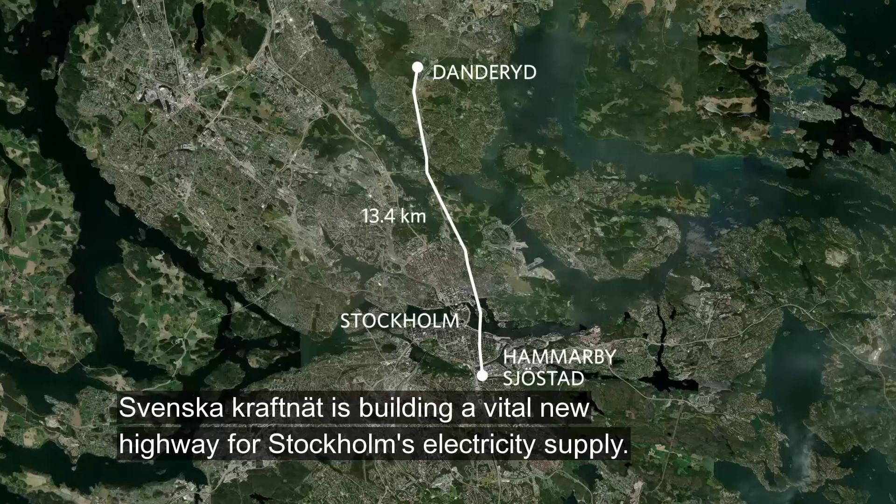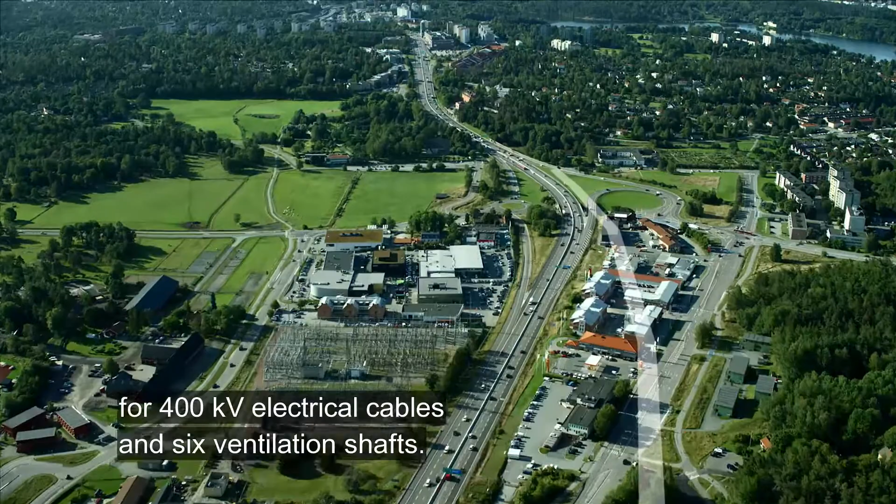Svenska Kraftnät is building a vital new highway for Stockholm's electricity supply. This is a 13.4-kilometre long tunnel between Danderyd and Hammarby Sjöstad for 400 kilovolt electrical cables and 6 ventilation shafts. The cable tunnel is part of an investment to reinforce the electricity network and safeguard Stockholm's electricity supply.

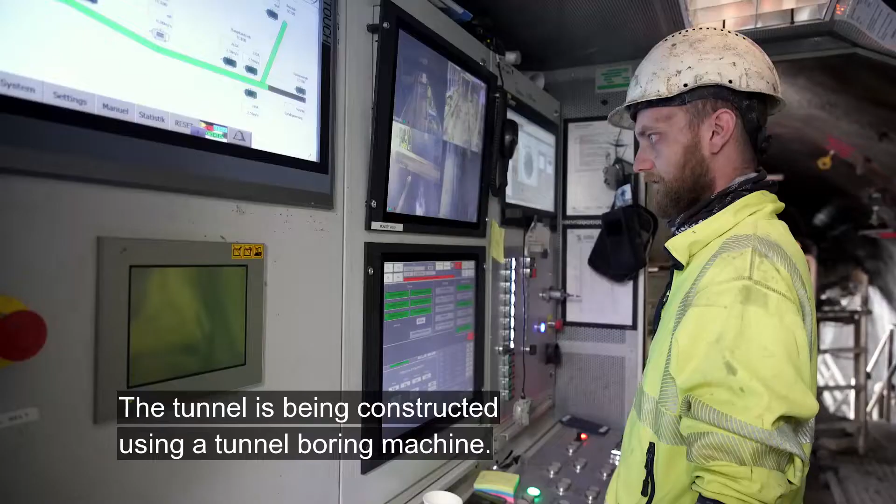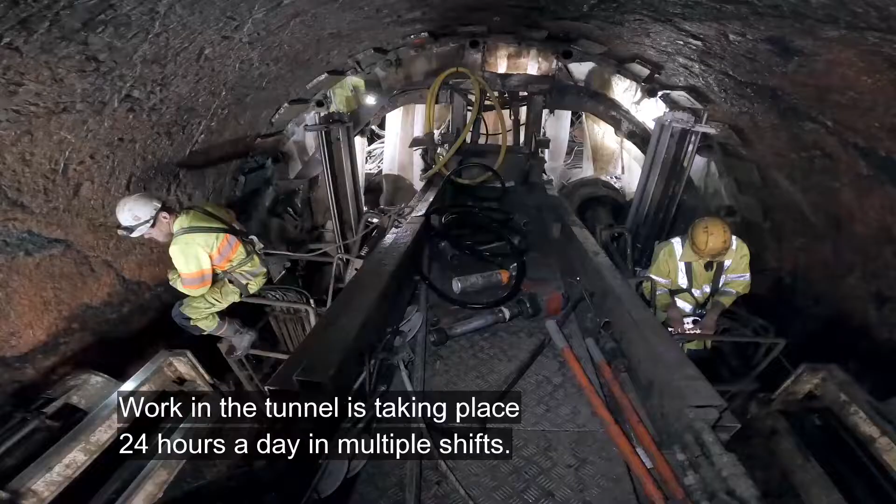The tunnel is being constructed using a tunnel boring machine. A joint venture between Hochtief and Implenia acts as the contracting company. Work in the tunnel is taking place 24 hours a day in multiple shifts. The teams working these shifts consist of people highly experienced in tunnelling, specifically working with tunnel boring machines.

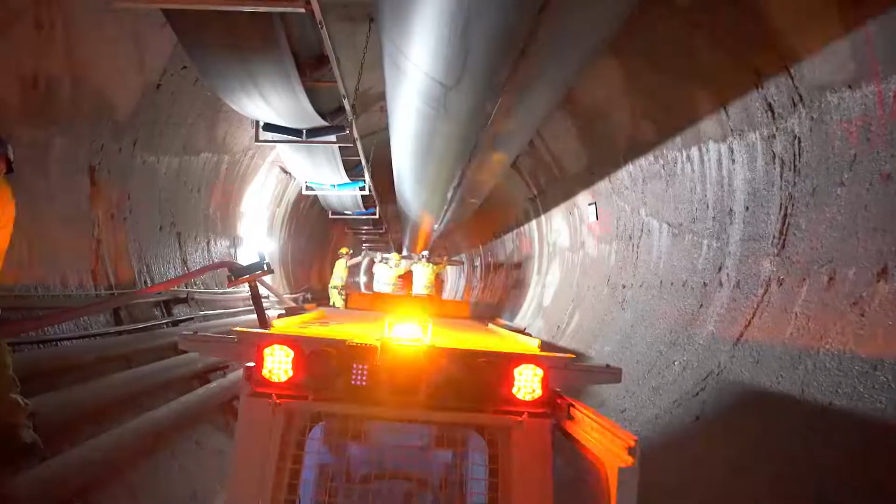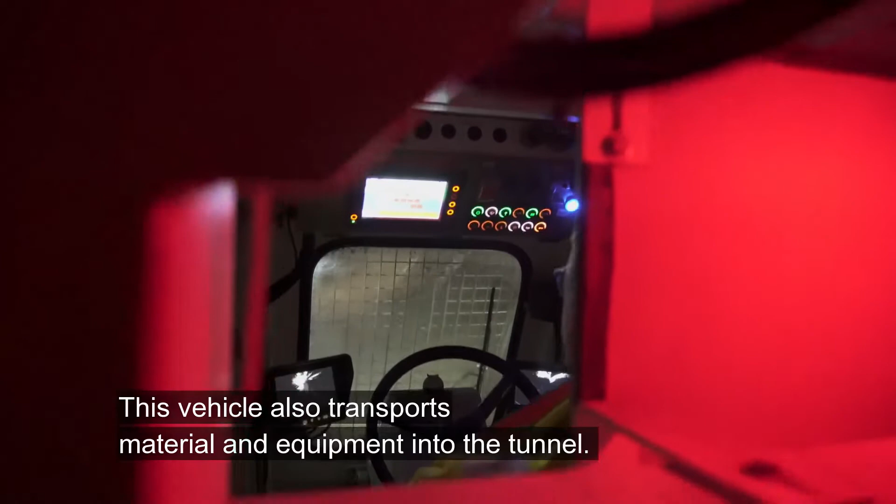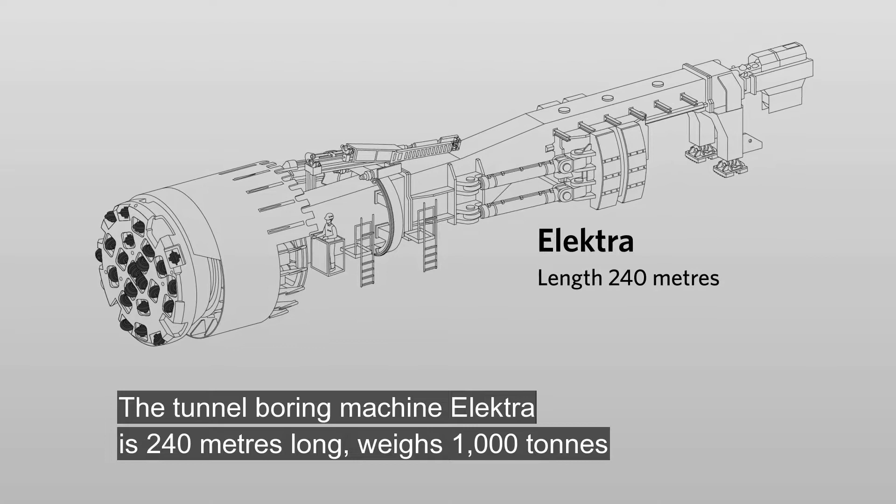The people working in the tunnel are transported in a specially designed vehicle that has driver's cabs at both the front and the rear. This vehicle also transports material and equipment into the tunnel. The tunnel boring machine Elektra is 240 metres long, weighs 1,000 tonnes and is manufactured by Herrenknecht in Germany. It's powered by electricity and requires approximately 3 megawatts of electrical power.

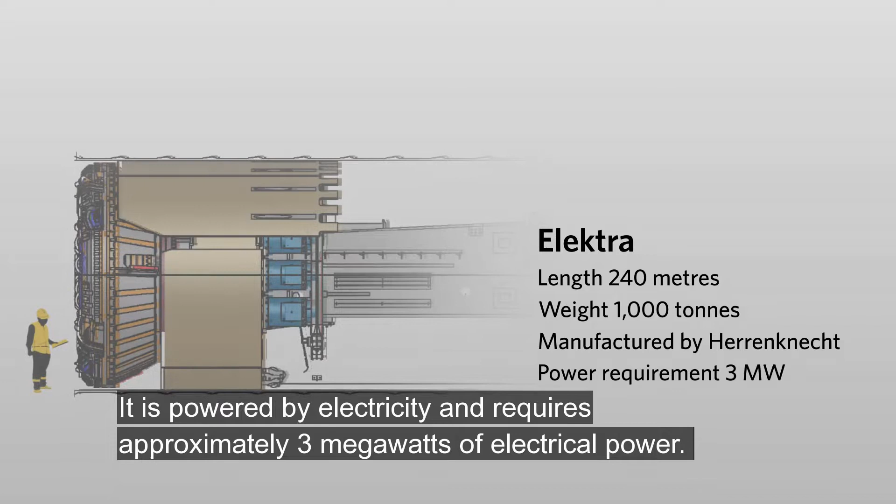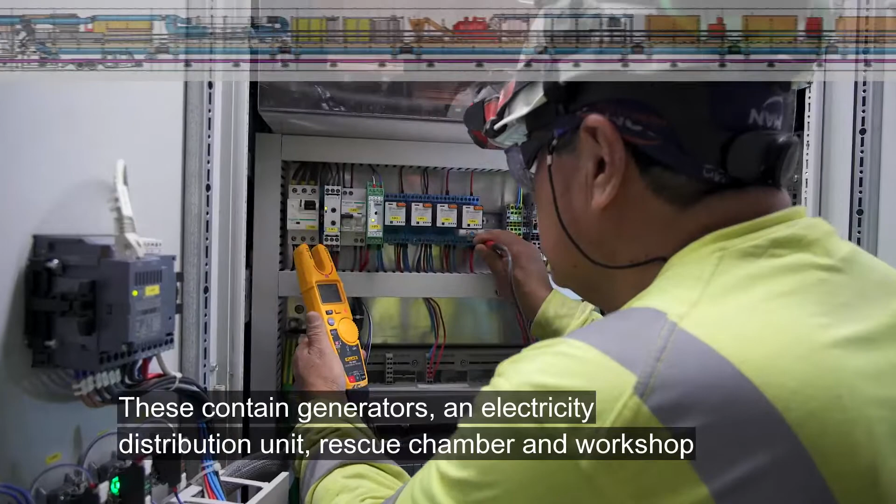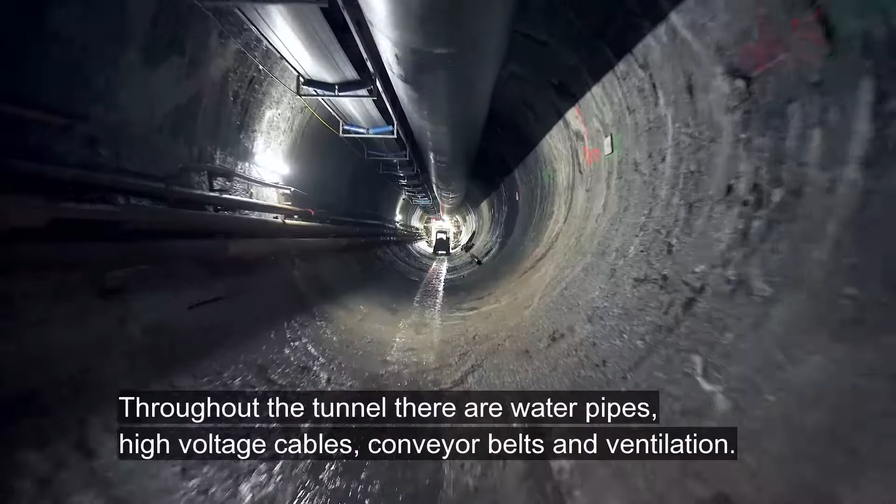At the very front is the cutter head, followed by 20 service cars that contain all that's needed for boring the tunnel, just like an underground factory. These contain generators, an electricity distribution unit, rescue chamber and workshop, as well as the operator's cab from which the pilot controls the tunnelling machine. Throughout the tunnel, there are water pipes, high-voltage cables, conveyor belts and ventilation.

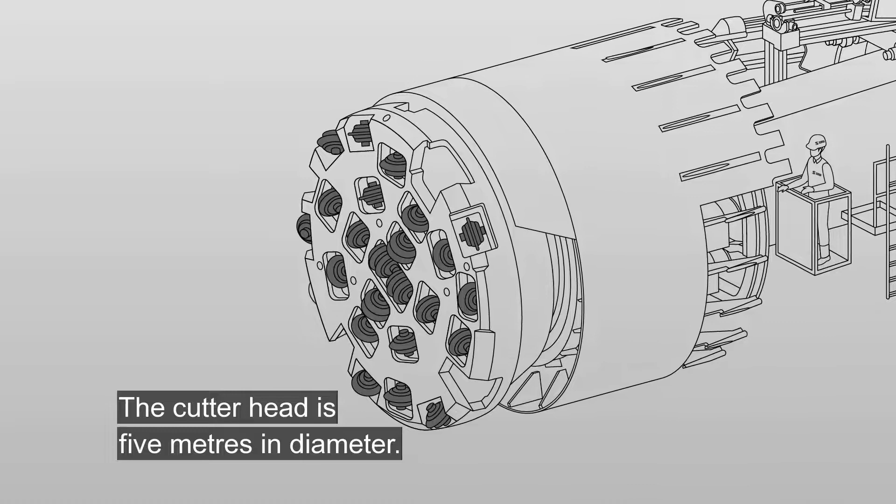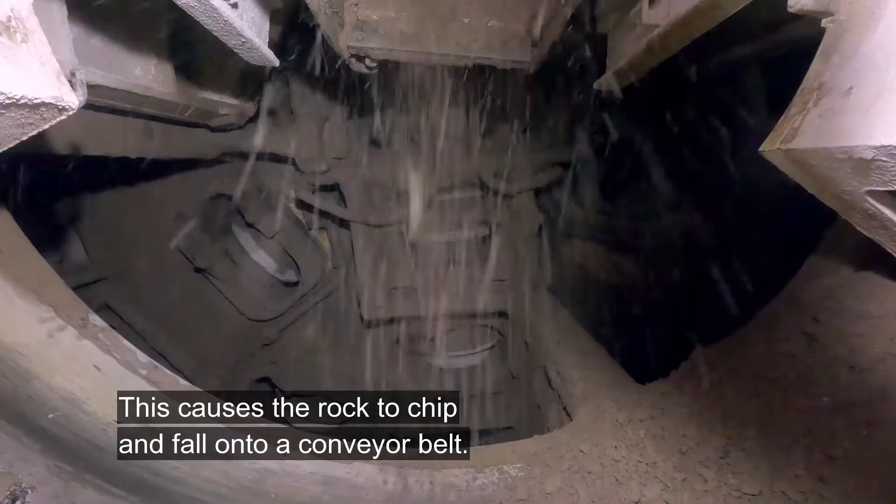The cutter head is 5 metres in diameter. It has 28 steel cutters weighing approximately 200 kilograms each. As the cutter head rotates, the cutters create a considerable pressure against the rock. This causes the rock to chip and fall onto a conveyor belt.

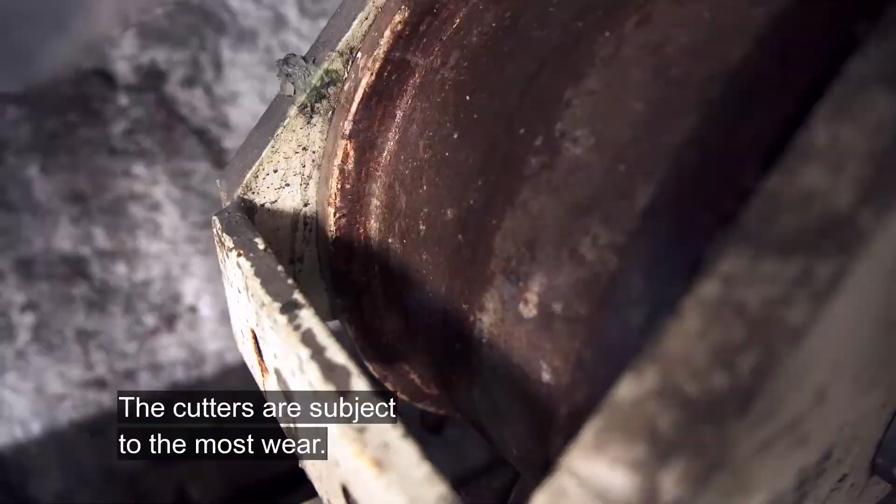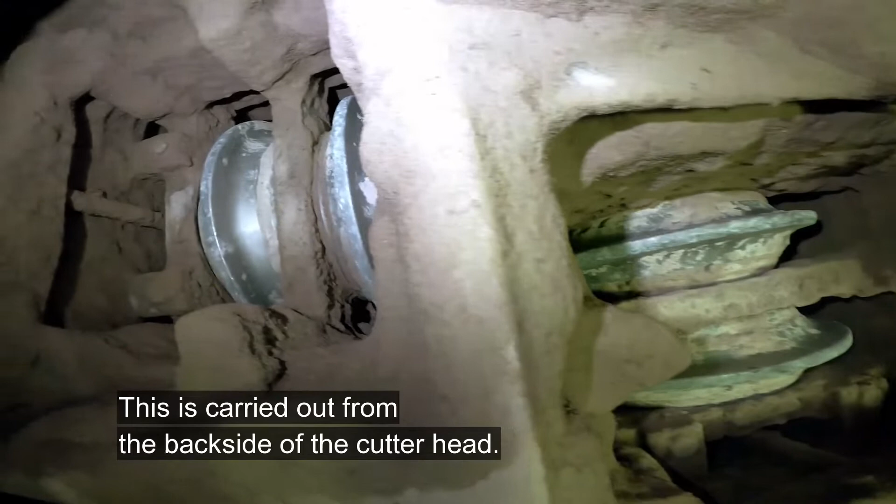The tunnel boring machine is subject to wear, which requires regular service and maintenance. The cutters are subject to the most wear. When they need to be renewed, they're removed, lifted down and replaced. This is carried out from the back side of the cutter head. When drilling is in progress, the entire machine shakes. The noise level is over 100 decibels.

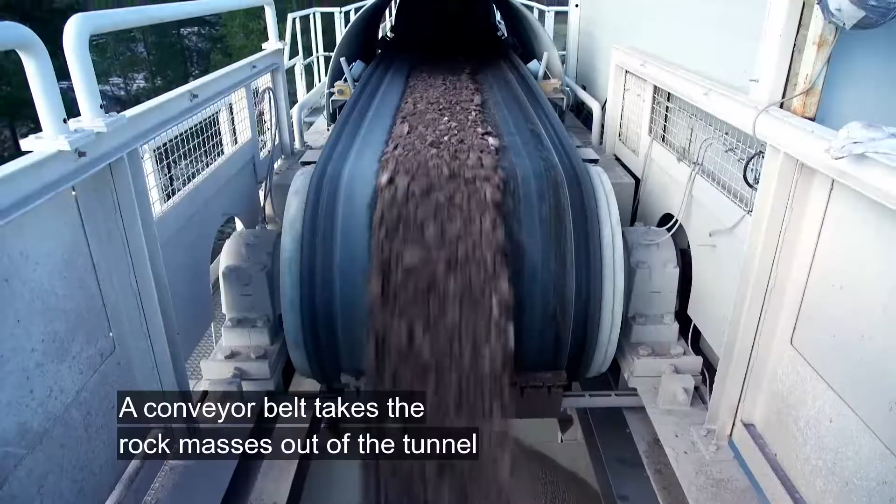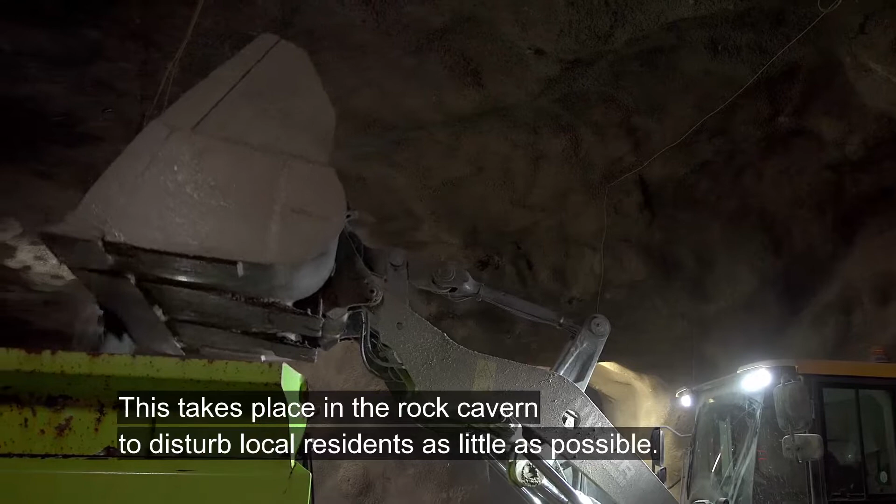A conveyor belt takes the rock masses out of the tunnel to a silo in Anneberg and down into a rock cavern. Here, the spoil is then transferred onto trucks. This takes place in the rock cavern to disturb local residents as little as possible. The spoil can also be stored in the rock cavern for a short period. The spoil is driven to reception facilities to be processed and reused, in road construction, for example.

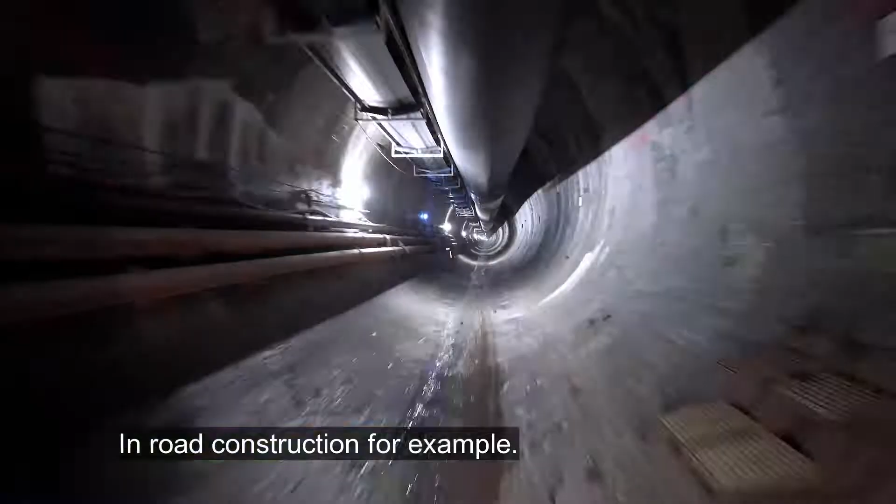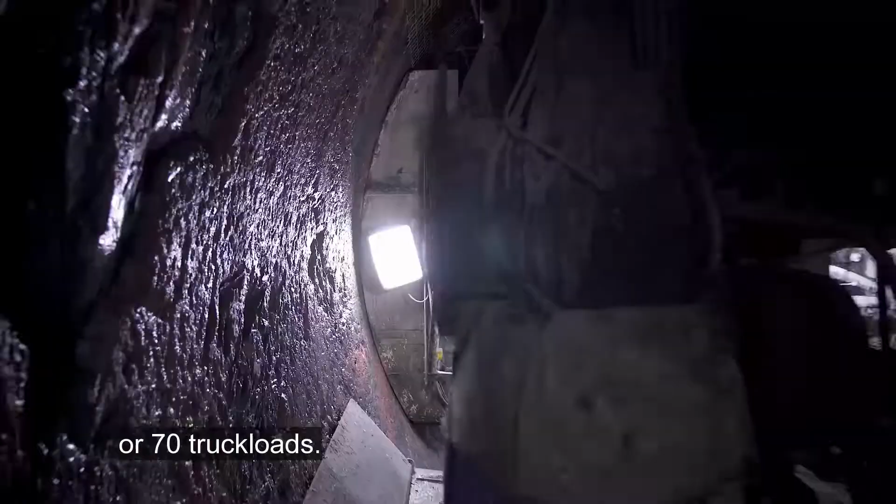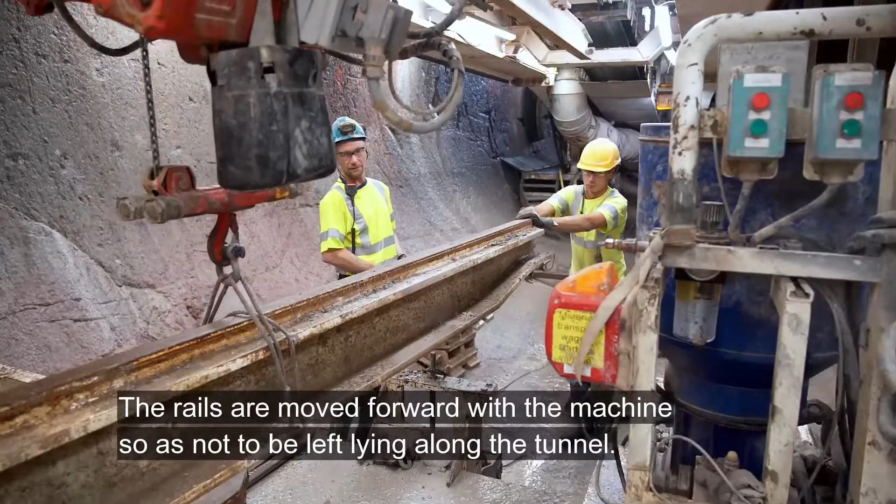An average of 70 metres of tunnel are drilled a week. This creates approximately 1,400 cubic metres of rock, or 70 truckloads. The tunnel boring machine moves forward by bracing itself against the tunnel wall with grippers. The rest of the tunnelling machine follows the cutter heads on rails. The rails are moved forward with the machine so as not to be left lying along the tunnel. As drilling progresses, water pipes, conveyor belts, ventilation ducts and high-voltage cables are extended.

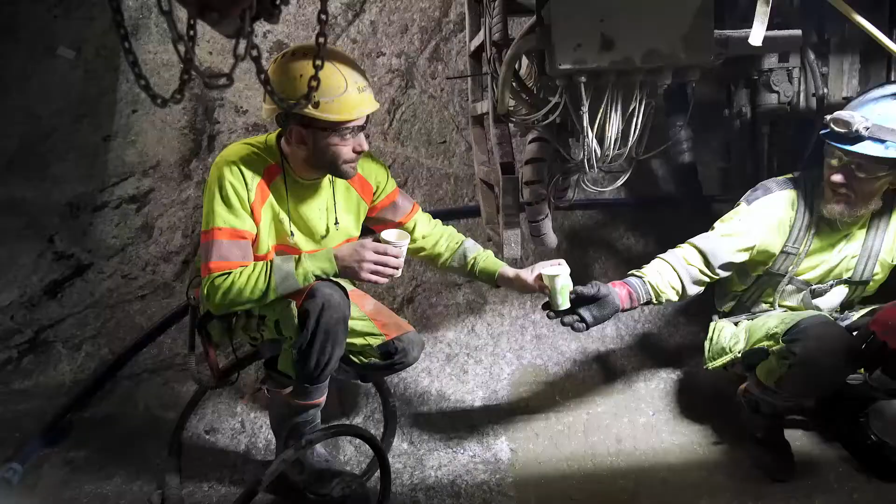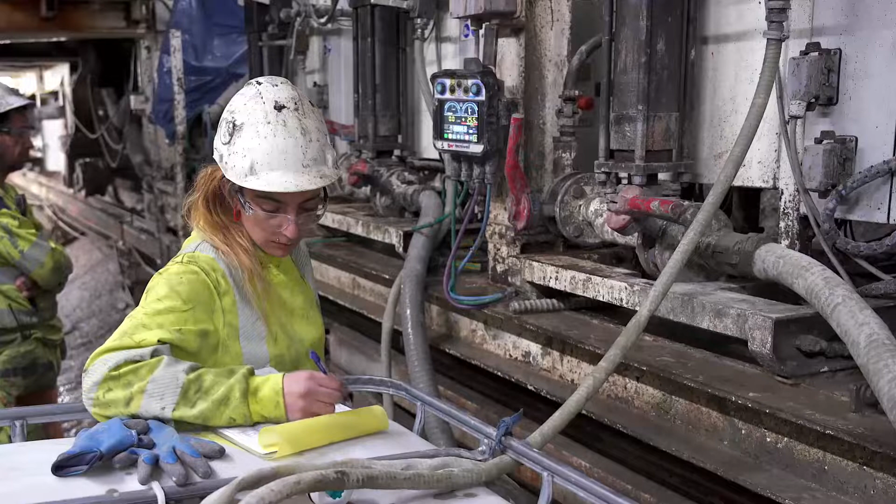Safety is a high priority to ensure that no one is injured. Safety equipment and working methods are reviewed regularly, and the personnel practice how to evacuate the tunnel. Work and preparation are carried out methodically before the tunnel boring machine starts. First, the rock mass conditions in front of the tunnelling machine are investigated.

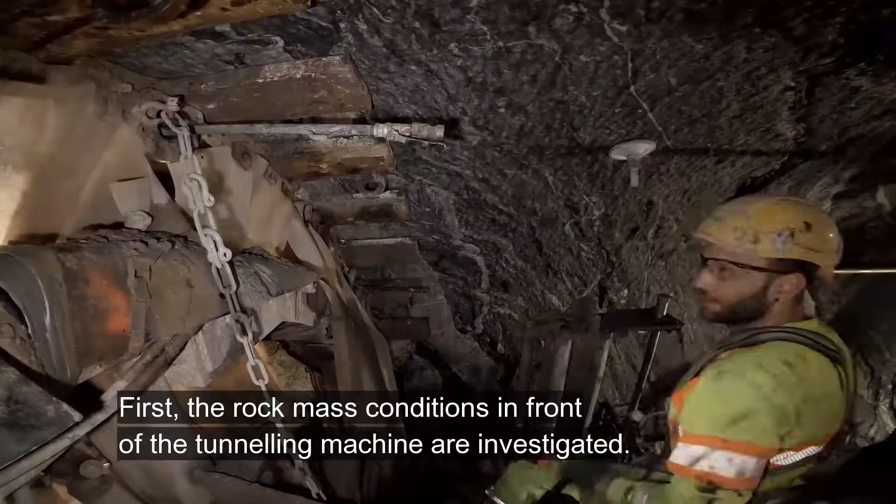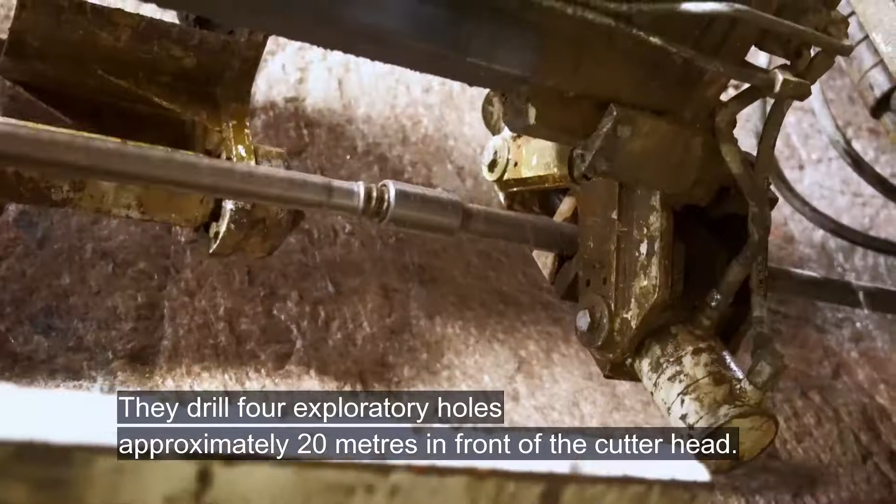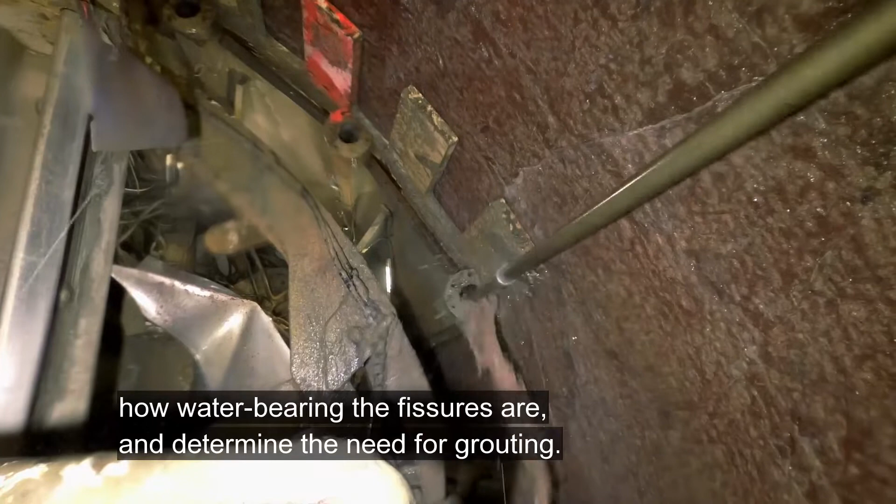The shift team carries out exploratory drilling and performs water loss measurements to find out about the rock and the need for grouting. They drill 4 exploratory holes, approximately 20 metres in front of the cutter head. These holes are filled with pressurised water. This gives an indication of the fissures in the rock, how water-bearing the fissures are, and determines the need for grouting. After that, an assessment is made of how much grouting is required.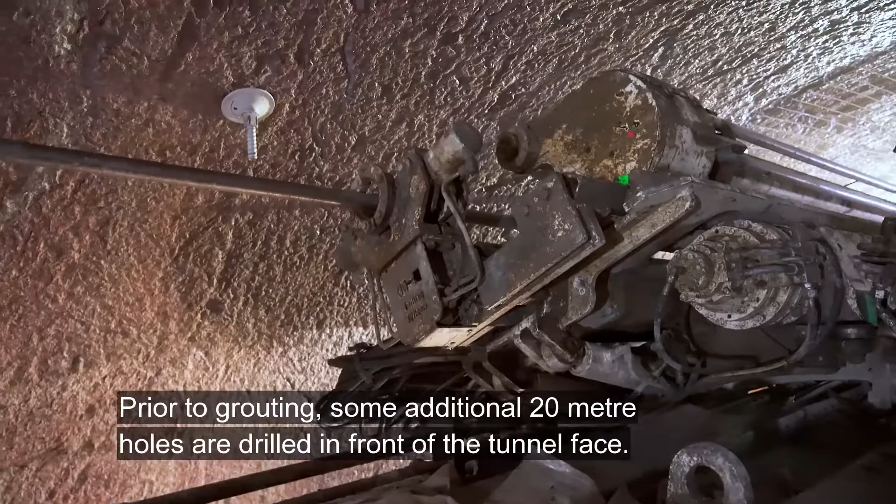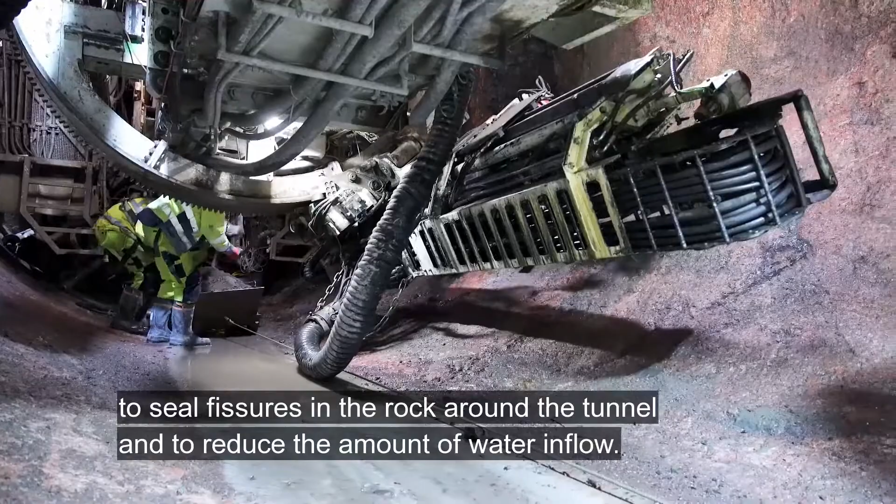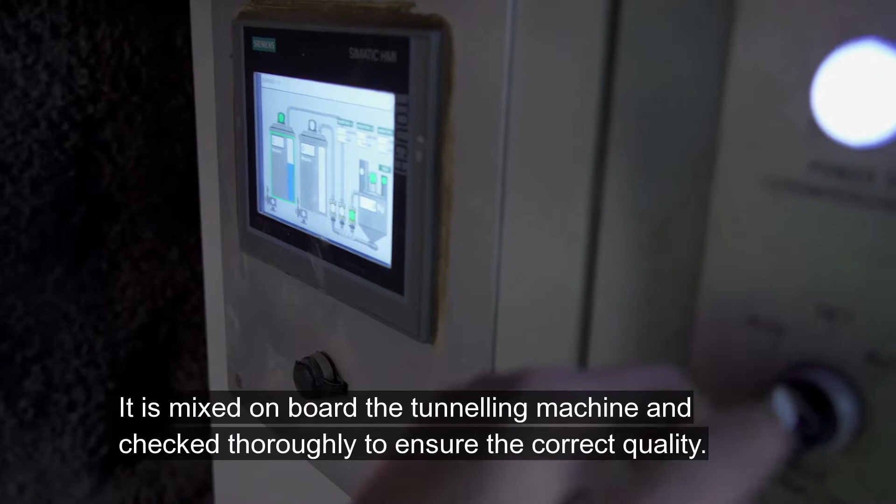Prior to grouting, some additional 20-metre holes are drilled in front of the tunnel face. Cementitious grout is pumped into the holes at high pressure to seal fissures in the rock around the tunnel and to reduce the amount of water inflow. The grout used consists of cement and water. It's mixed on board the tunnelling machine and checked thoroughly to ensure the correct quality. The deeper the tunnel is underground, the higher the pressure needed to withstand the groundwater pressure.

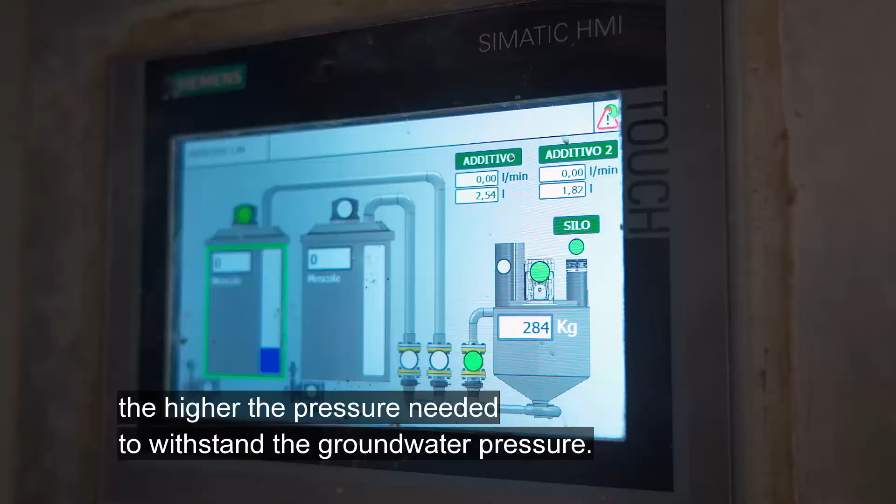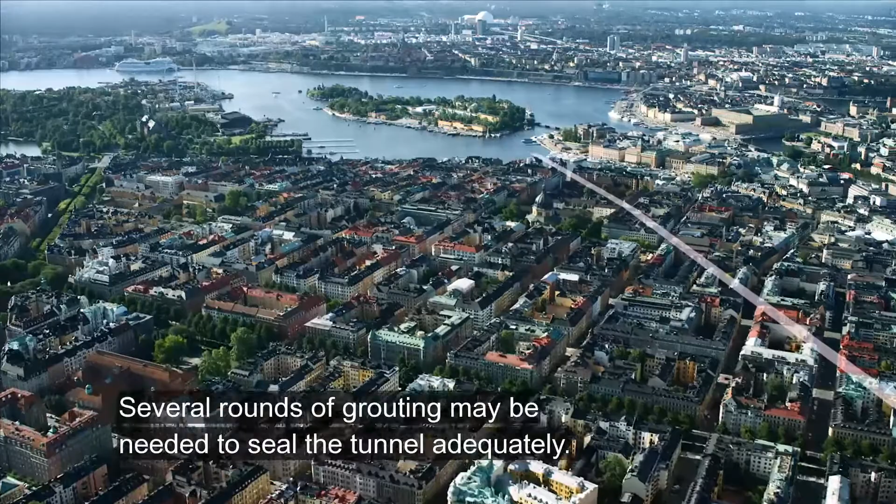The amount of water that can flow into the tunnel is governed by the project's environmental court ruling. The permitted volume of water varies in different sections and depends on how sensitive the environment has been assessed at that point so as not to cause harmful groundwater subsidence. Several rounds of grouting may be needed to seal the tunnel adequately. There are also sections where grouting is not needed at all.

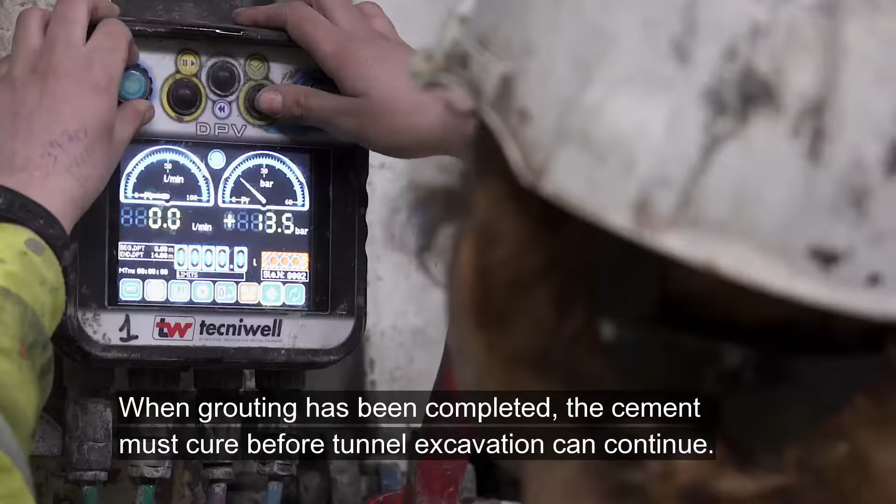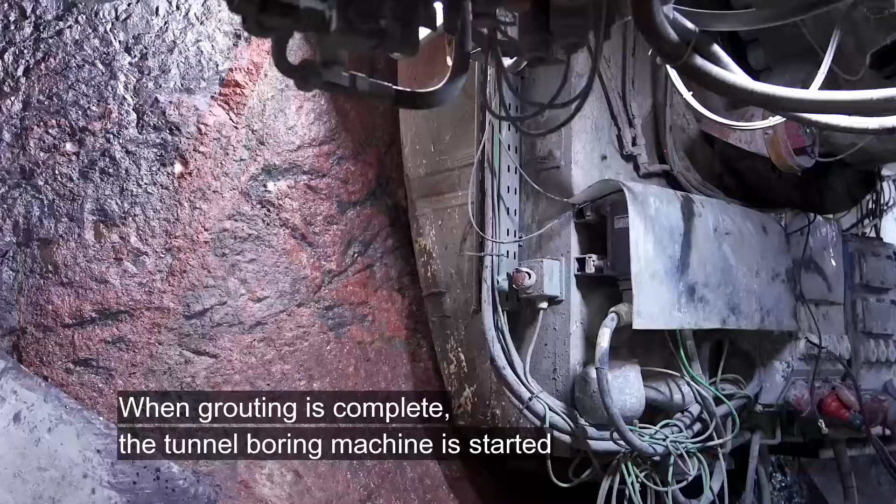When grouting has been completed, the cement must cure before tunnel excavation can continue. The grouted rock looks like this. When grouting is complete, the tunnel boring machine is started, setting its sights on another 20 metres before the next round of exploratory drilling starts.

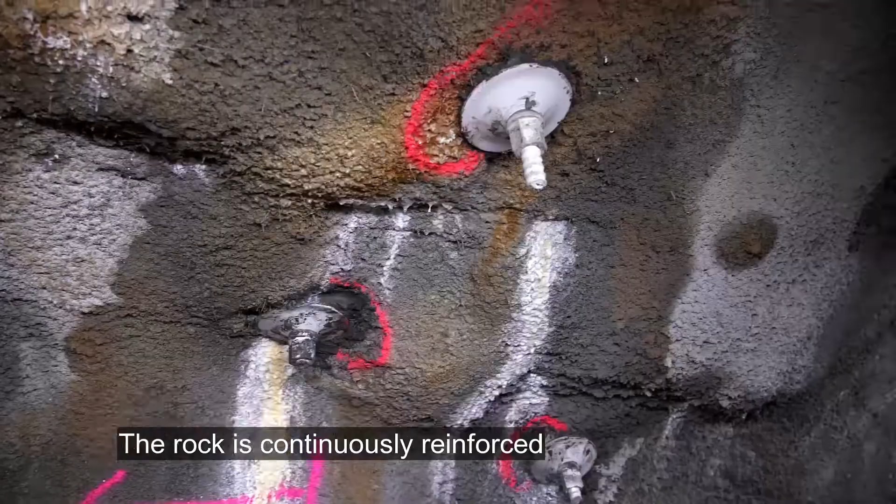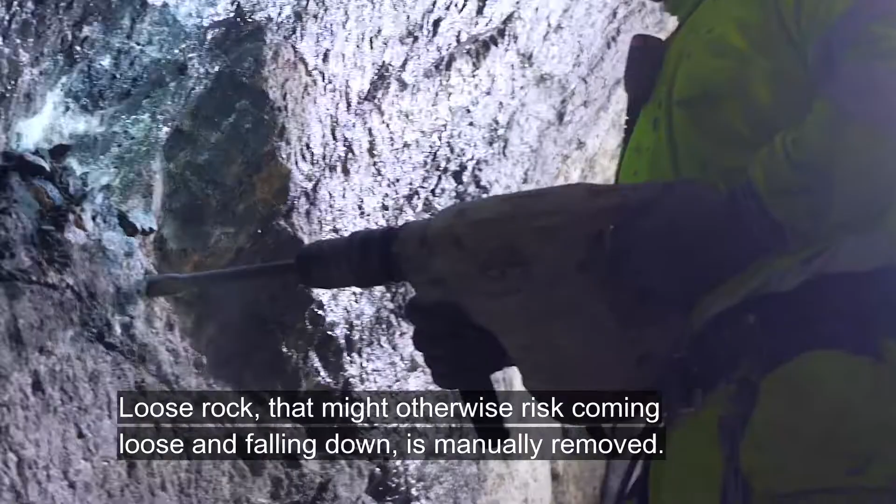The rock is continuously reinforced so that the tunnel is safe to work in throughout the tunnel's service life. Reinforcement is tailored to rock conditions and to requirements. Installing rock bolts and shotcrete is usually enough. Loose rock that might otherwise risk coming loose and falling down is manually removed.

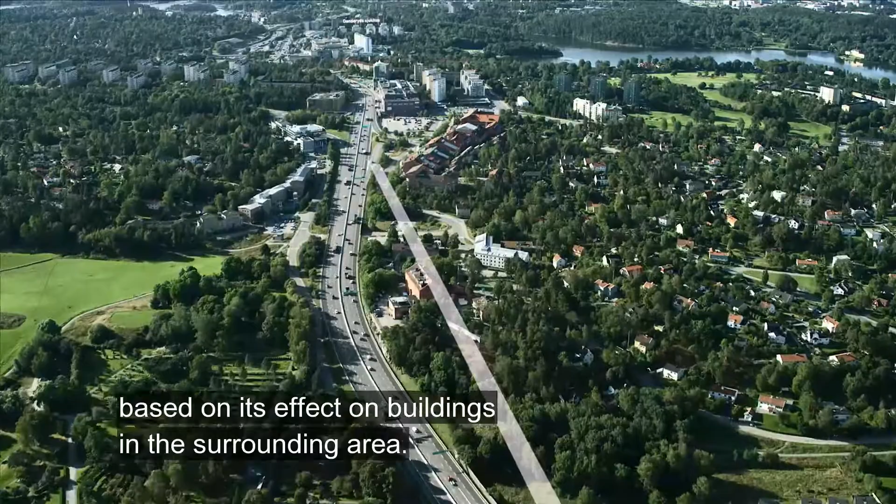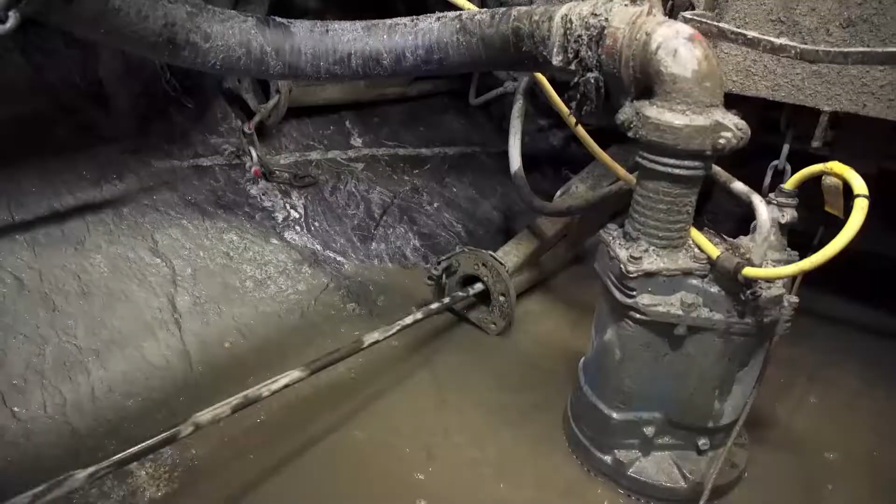The project's environmental court ruling governs the working hours for tunnel boring based on its effect on buildings in the surrounding area. For a large part of the route, tunnel boring can only be carried out between 7 AM and 10 PM so as not to disturb residents at night. The water used in production is treated and sampled before it's released into the municipal surface water network.

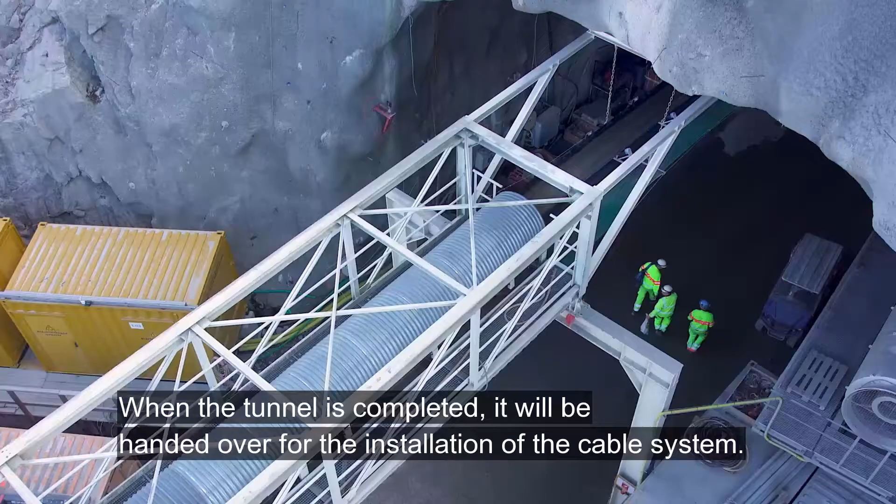When the tunnel is completed, it will be handed over for the installation of the cable system. The tunnel between Danderyd and Hammarby Sjöstad is a new vital highway for Stockholm's electricity supply.